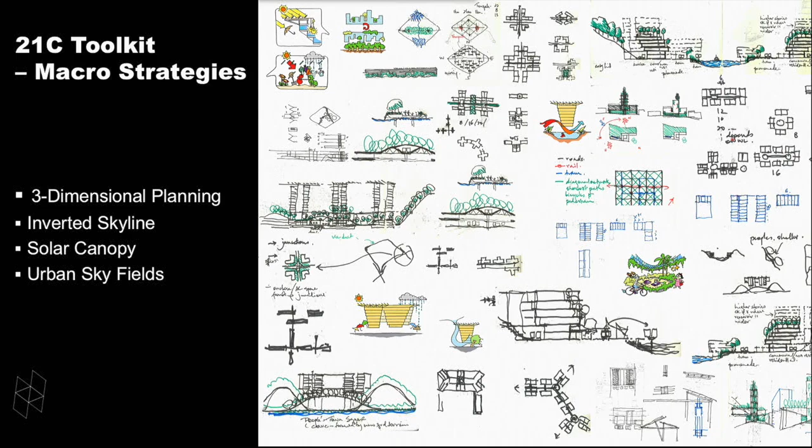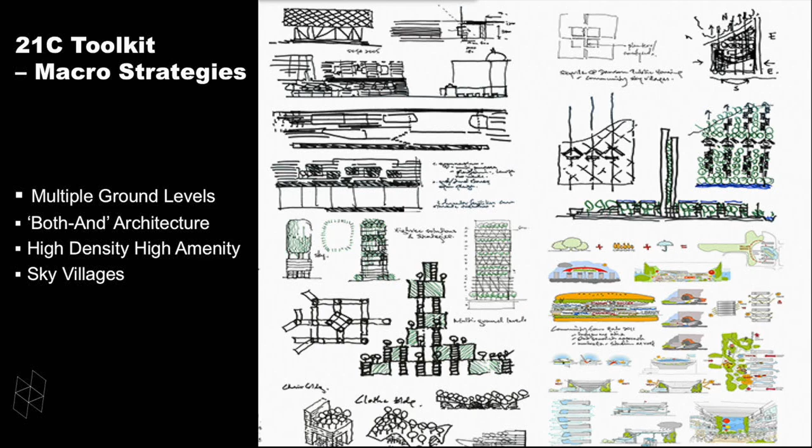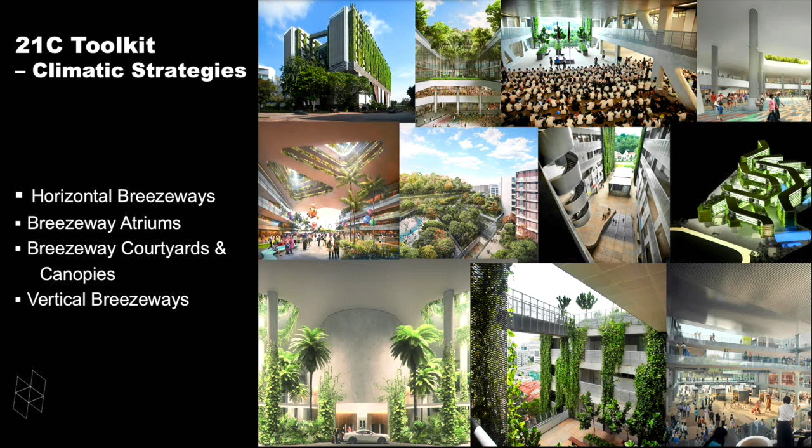Just because when we did our exhibition in Frankfurt, the German writer doing the catalogue was going, all this talk of wind, it sounds so unpleasant. And only when she came to Singapore did she realize how hot and humid it is and what still air we have. So this idea of wind, or breezes, which sounds a bit obsessive, is really the key to a low energy solution in any tropical development. The minute you create a pocket of dead air, it's actually unbearably hot and humid.

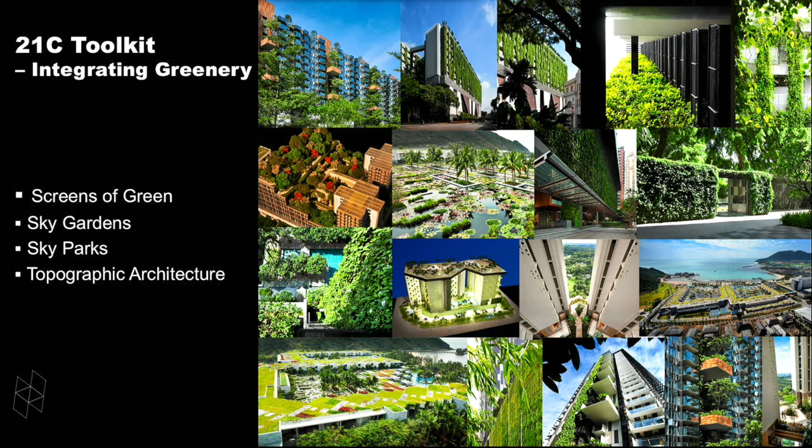And the final one, topographic architecture. There's a strange family of forms that you associate with architecture, but once you start putting plants all over them, the old divide between constructed elements and nature starts to blur. So we're thinking of ways that natural formations can actually inform the way buildings are conceived.

And then finally, as we were going through these and thinking about this 21st century city, we were thinking that there need to be metrics or measures that might be able to track this development, or ensure that some things we think are really important could be compared and measured between different developments. So we've started using these measures to analyze our buildings and track where they're going.

I think green plot ratio is something becoming quite a commonly used term, but essentially it's what proportion of your site area is available for gardens. The next one, community plot ratio, is this idea of high density, high amenity, making sure that the ratio of community space to other programmatic areas is kept the same or enhanced as you do a hyperdense development.

Ecosystem contribution index, so we're thinking of how, with all this potential for nature, to then take it one step further and say how productive is the nature, and how much does it support plants and animals and insects in the city.

Civic generosity index, so this is something we were trying to think, well, if you characterized your development or building as a person, what kind of person would it be? Is it a selfish, mean, psychopathic person who closes out everything else, or is it a welcoming, generous, open and friendly kind of development?

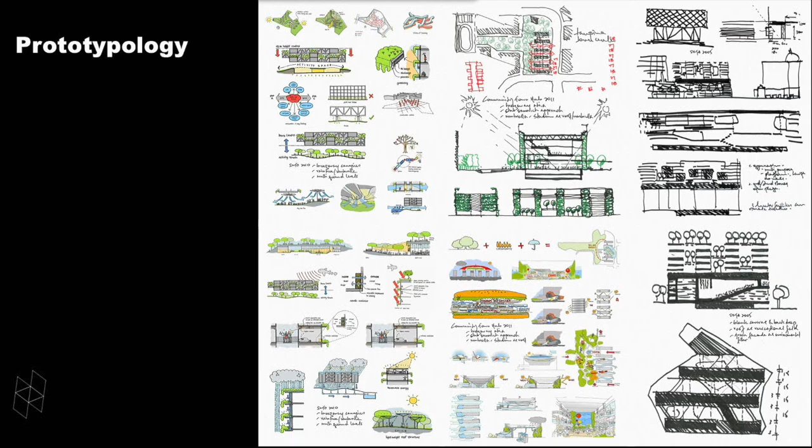So this was one project that we took part in the year 2001. It's something that was a competition, a public housing project of about 2,000 units. We didn't win this competition, but it was quite important to us because it sort of formalized a lot of our thinking about high density, high-rise solutions.

And one of the buildings that actually eventually got built is the Pinnacle in Singapore. But one of the fundamental differences between the building that was actually built and the building that we envisaged was really about the idea of creating communities in the sky, rather than purely just having homes that are just elevated above the ground.

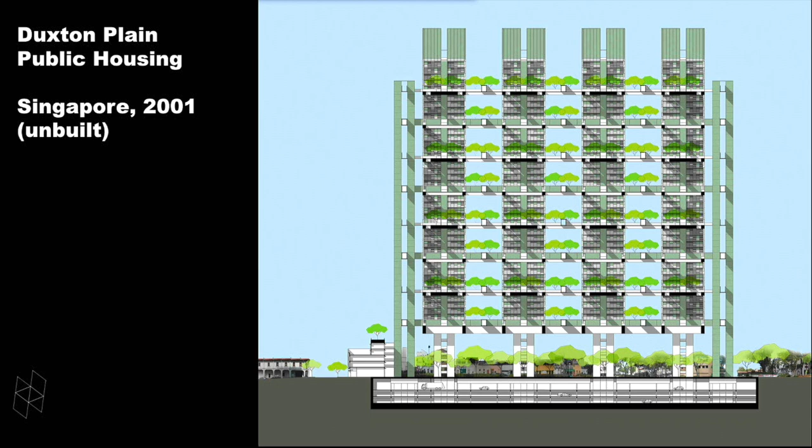But our thinking really was how we could actually create people who would start to bond and to actually know one another fairly well. And some of these strategies that we really adopted were things like creating one-room thick apartments, arranged in a way that they actually divided into horizontal datums, many multiple ground levels, where you actually do enter your homes, or where you go to your homes, you're actually walking through horizontal streets rather than taking an elevator up to your apartment, which normally what high-rises would do.

But the idea really is to create people to come up to a certain level and actually allow them to walk horizontally to actually connect to all the buildings, but at the same time, it's like a street. You actually start seeing people, knowing your neighbors, making friends, and the sense of community would actually happen from there.

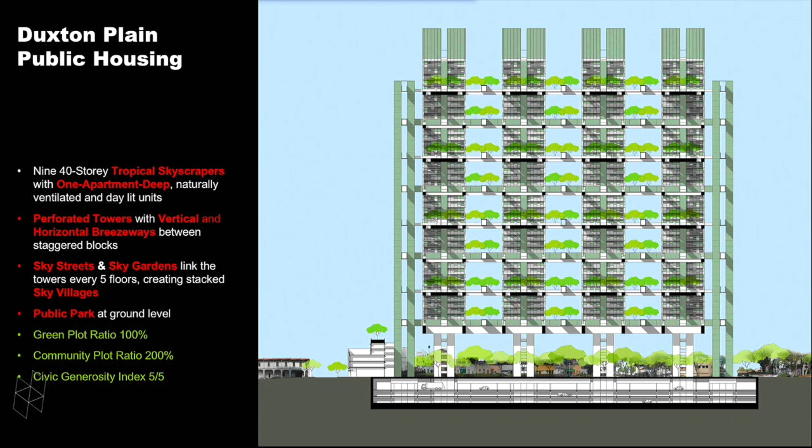This is a floor plan. It's basically 9 point blocks in a way, towers with a core in the middle. But the difference is they're linked up with a matrix every 5 floors. The 4 little squares you can see at each end, they're the high-speed lifts. So the idea is you would take a high-speed lift up to a street every 5 levels.

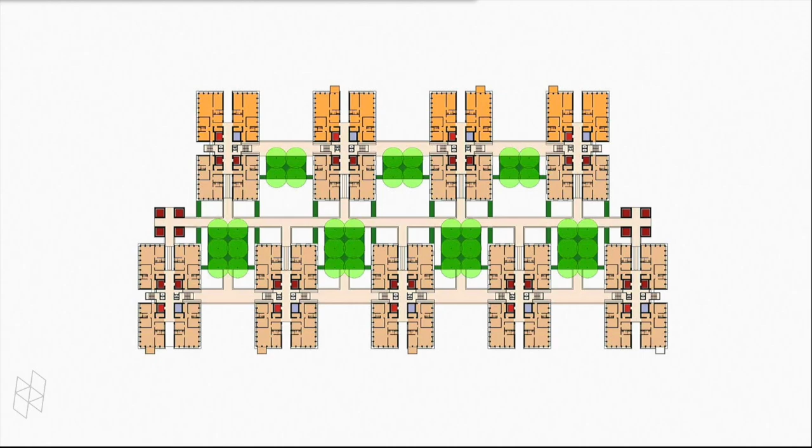You would then walk through the street back to your apartment through a series of parks. These are the sort of spaces that you get between the blocks. So although on plan it looks fairly congested, in fact the distance between the towers is about 18 metres.

Which is the same as the streets of Chinatown where this development is located. And by dividing it up and having these trees and human-scaled elements between the towers, the 18 metres actually feels quite a comfortable street scale, despite the fact that they're 50 stories tall.

This project did get built. This was 2 years after the competition, in 2011. We were given this opportunity to actually build this fairly high density, high-end development in Bangkok. And I think we managed to use a lot of the ideas, a lot of the strategies from the Duxton Plain competition and actually realize this mega structure.

I think one of the things that we eventually did create was, instead of having a very big and dense building, we pulled the buildings apart into 6 very tall and skinny towers, allowing almost all 4 sides of the apartment to have windows so that you can have very good cross ventilation through it.

So this is a typical plan where you can see it's actually 6 individual towers attached to 3 cores.

Connecting all the 6 towers are horizontal structures that also form private swimming pools as well as community public spaces on 2 levels in the building.

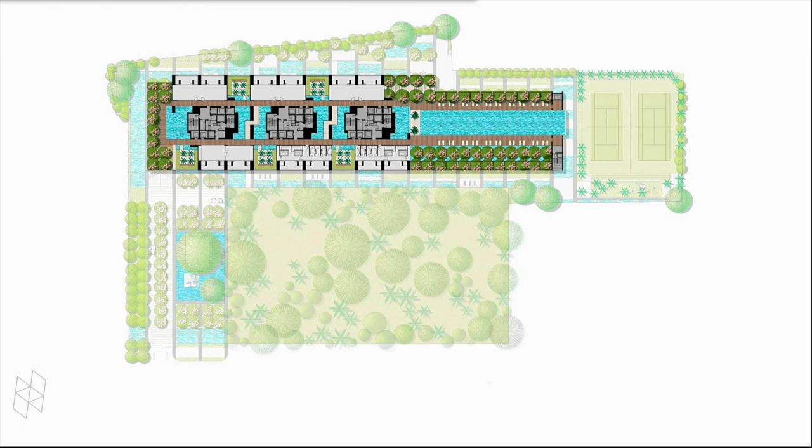So that will be on the 9th floor, where you almost have a new ground level with all the recreational and community spaces.

And you can see here at the 9th level, we have all the facilities like the gym, and we also put a lot of water on this level.

One of the reasons is that this water would actually draw the air up through the spaces to the top. We've done some tests, and we managed to have air movement of between 1 to 1.5 meters per second from the bottom to the top.

So if you open your windows in your apartment, the air would go through the apartment and then get drawn up to the top. These were the spaces in between the blocks where this hot stack effect happens.

This kind of open plan allows you to get rid of most of the vertical services through the building. So they become quite basic buildings in a way, where you just have the lift, you have the water pumped up and down, but there's none of the vertical extraction of toilet exhaust or kitchen exhaust. You can have individual unit cooling as well.

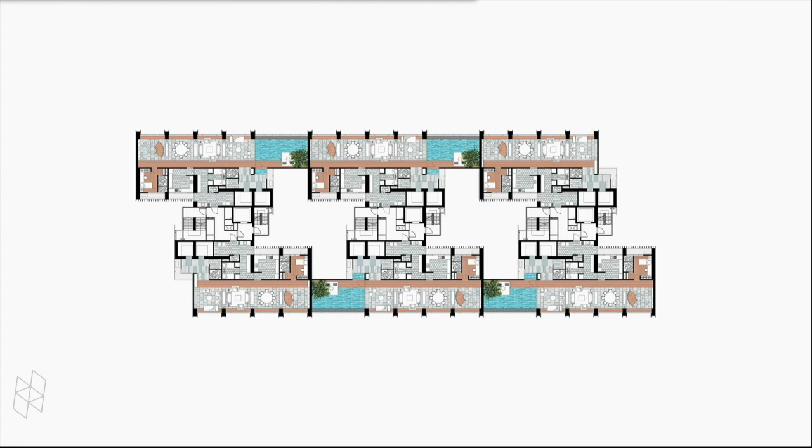In fact, City of Sydney recently did a study and found that even in Sydney's mild climate, 60% of the energy use of the building was just in the common areas, the car park, lift lobbies, and ventilation, which seems extraordinary considering that's only 20% typically of the building area.

So this would be one of the units on every 6th floor, a duplex unit, which has the living and dining spaces flowing into private swimming pools and gardens.

Then you can actually see all the swimming pools stacked 6 stories up, all the way up to 69 floors.

This was a lot smaller project, but it was also done at almost the same time as Newton Suites. What we were really keen on with this one was how we could create small sky gardens in the development, so that you could compensate for the lack of size in the apartments. At the time we developed this, these became the smallest apartments in Singapore.

In Singapore, where most people live in high-rise apartments and public housing, they don't actually understand the sense of living on ground. We wanted them to be able to enjoy a small piece of garden and to feel like they're actually quite close to landscape.

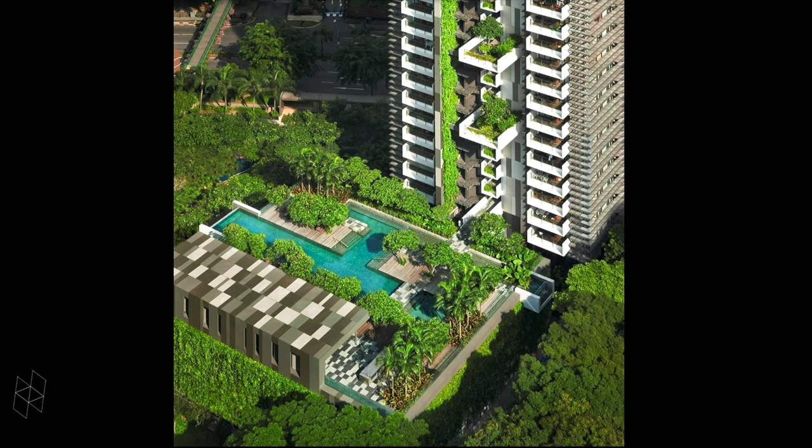This was one where they just changed the regulation in Singapore to make common gardens in the building not considered as floor area. That made a big difference to the economics of it, because land costs in Singapore are very expensive. So if you lose area for gardens, that means the developer can't sell that area for apartments. By making it free of floor area, the developer pays to build these little gardens but doesn't lose any saleable apartment area.

That was basically the key to unlocking all the future projects where we use these gardens in Singapore.

So the plan is actually quite simple. There are only 4 units per floor, and 2 lifts for the entire development, arranged around a small sky garden and a fire escape that's used to maintain the vertical greenery in the development.

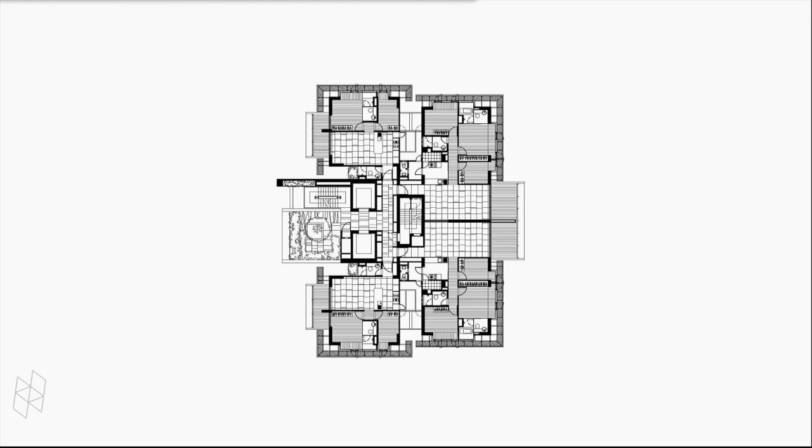So in cross section, you have these little sky gardens every 5 floors, and when you come back home to your apartment, it's like coming back home to a house, where you actually see a garden first before you open your door into your apartment.

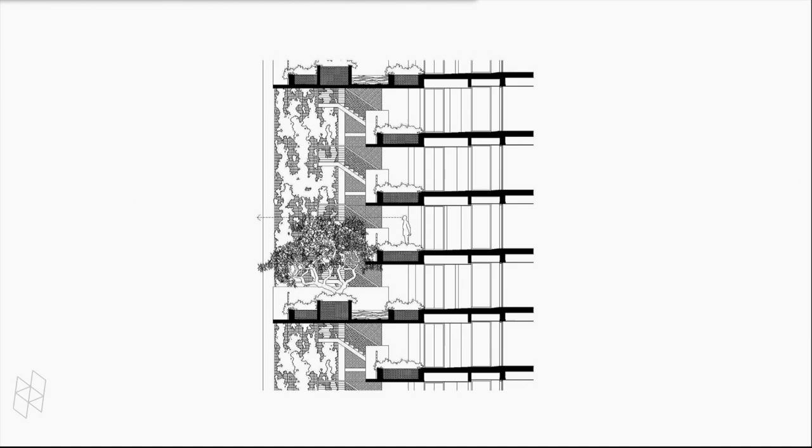Another trade-off we did was in the lift speed, because lifts come in quantum jumps of speed. The lift engineer said no, for a building of this height, you need faster lifts, because of the waiting time involved. We said, but you can have maybe 5-10 seconds more waiting time when you've got a garden outside the lift and a view, versus an internal lobby. The lift engineer didn't agree, but the client agreed. And no one has ever said the lifts are slow, because time feels very different when you're looking at a little garden.

The apartments are actually quite small. The two-bedroom apartments were something like 60 square meters. We do have young families living here, and instead of feeding the kids in the apartment, they actually bring them out into these common sky gardens and have them fed there. It's also very popular with expats and young working adults who smoke - they come to these little gardens and gather together, and it's highly popular for young adults as well.

I think what was really interesting for us was that we got a complaint from one of the homeowners on the 24th floor. When we found out the complaint was that the kids got stung by bees, we were actually quite happy to note that we managed to have insects, living creatures, all the way up that 24th story.

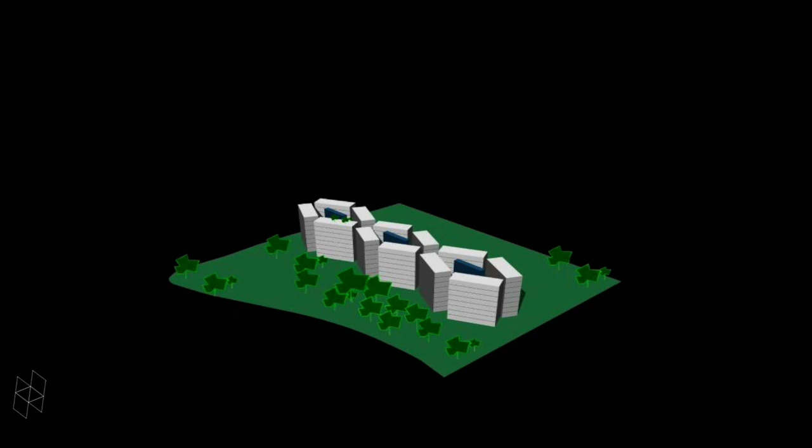You want to explain these diagrams, Richard? Yeah, so the idea was we felt 960 houses was really too many families to get to know each other, so we were interested to create a sort of smaller unit. So the idea was that every apartment belongs to a village, and a village has 80 homes in it.

So we have 12 villages of 80 homes, and these share this physical volume of a sky village level, and then as you come out of your lift, you will cross this volume, you can look down into it, and it has a completely different sense of scale to what you would normally expect in a 47-story building.

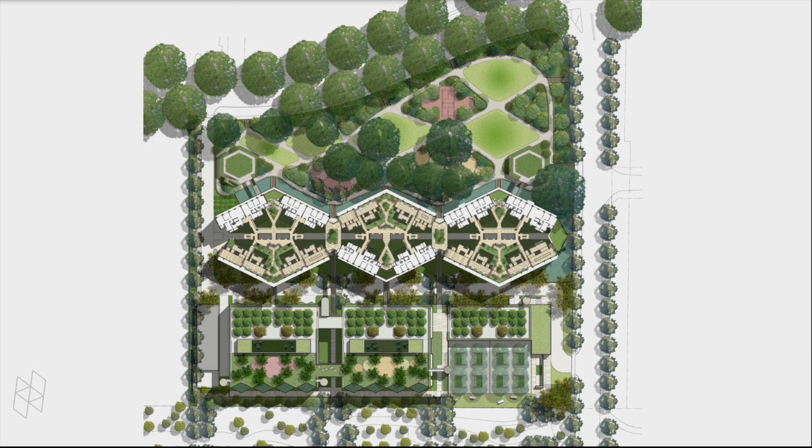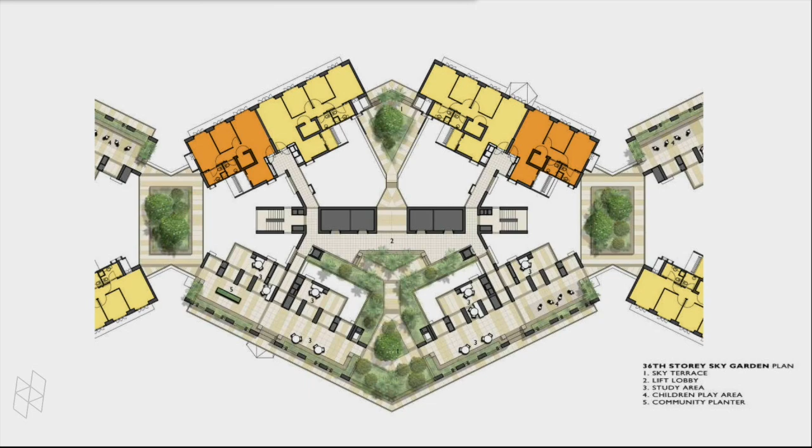So the plan here shows this diamond-shaped plan, so that's the big move, is really to open it up into this diamond and create the space inside. And then if we zoom into one diamond, you'll see that we dropped apartments on one side of it as a double volume space, and this has gardens and spaces for just meeting and having a barbecue.

So vertically, each tower is divided up into these 4 villages. And these are the kind of spaces. As public housing, they don't have a very active management, so they're quite simple.

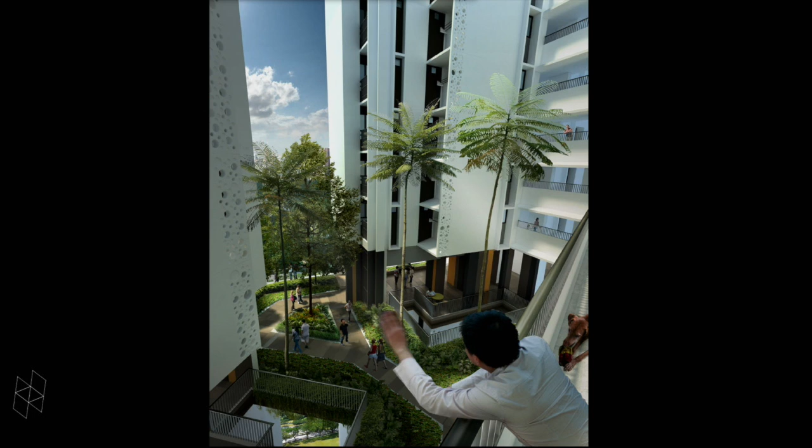And this was also the rendering that we did originally at the start of it. And one of the things that was quite important for us was really to maintain visual contact between these 80 homes and that common space.

It's actually up to 8 to 9 stories, and 11. That what, 10? 11 total. 11 total. And I think that was actually the furthest that we will go, so that when you're up at the 11th story, when you look down, you still can actually recognize the person on the common space.

The idea is your kids would play here. You would bring the dog here to walk it. You could just have, so there's a very different thing that you can step out of your apartment door and call your kids home for dinner, for instance, which is something in a typical high-rise you just can't do.

And it's an interesting way it sort of frames the city and pulls the views into this space in the middle.

So this is a different kind of development. This is actually a School of the Arts, actually located in the heart of the civic entertainment district of Singapore. And this was actually a very compact specialized art school for young kids from 12 to 18 years old.

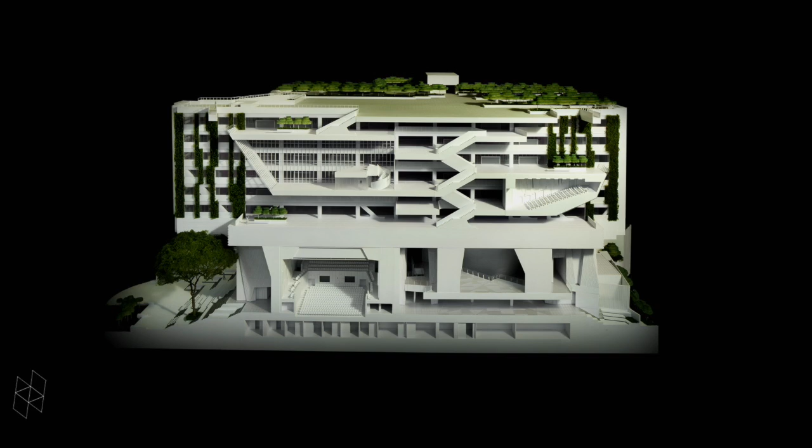This was on the lower level where we actually have the 3 performing arts facilities. And it's actually a public thoroughfare. Anyone can actually walk through it.

But what we did was we actually chose not to air condition the pre-function spaces of the theaters, and these were actually used for other uses like large functions that the school would actually organize. And then behind them, they're actually the performing arts facilities.

But on the 5th level, you can see it's almost the entire site area, and this is actually used as the assembly hall, assembly floor for the school.

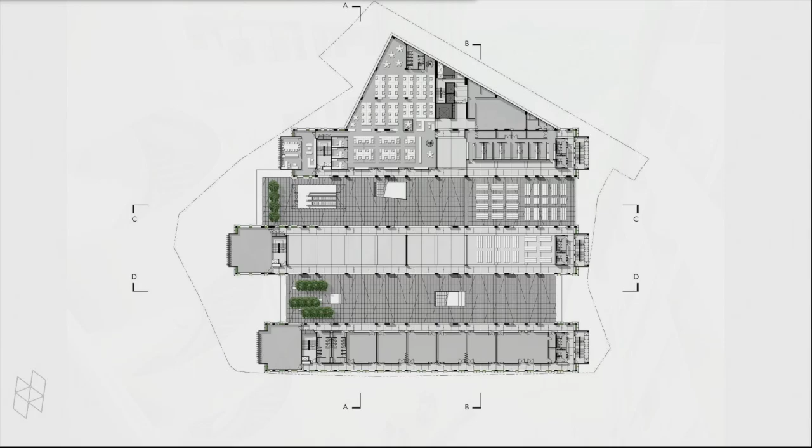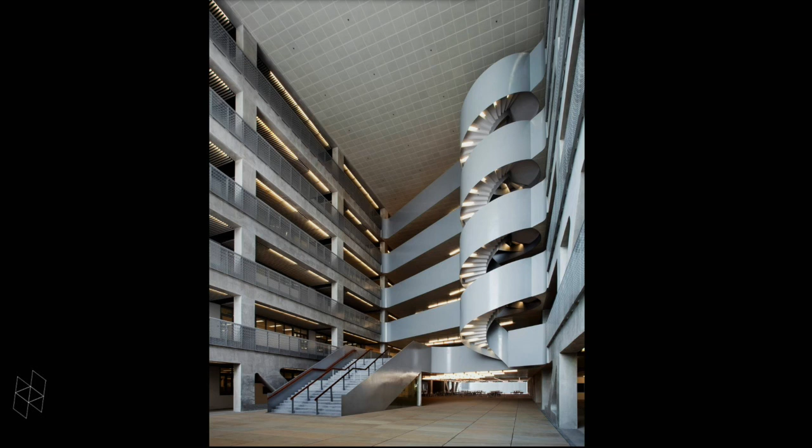You can actually see there's light at the other end, so it's a through space. This is where the wind gets funneled through these spaces, and because the wind does move through them, the classrooms themselves are quite effectively cross-ventilated as well.

We have a variety of gardens that float amongst these spaces, so between lessons and lunch break, the kids have outdoor areas to play. And the roof itself has a 400-meter running track around it.

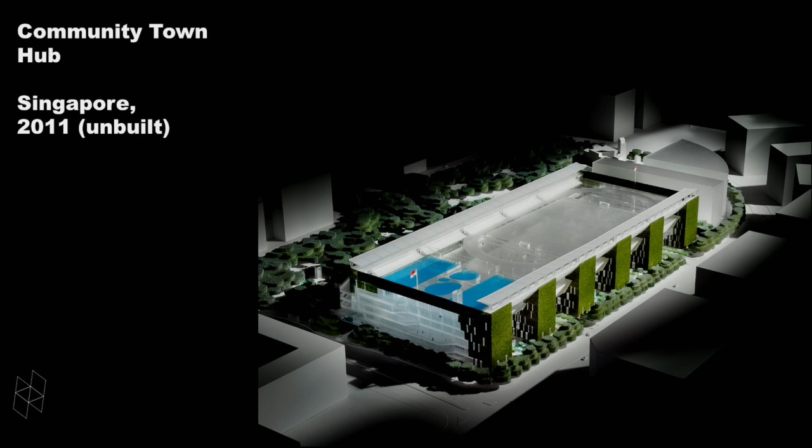This one was a competition entry that we did, but something that would not be built. I think this was something that we wanted to demonstrate, that we could actually think outside the box and use the stadium as the roof of this large facility.

This was really an institutional community project, consisting of many government institutions as well as commercial facilities. But they actually asked for a stadium. One of the things we thought was that if we put the stadium on the ground level, which is normally what people would do, you'd end up covering a much larger footprint. What we wanted to do was try and create a natural park that joined up with the linear park adjacent to this development site.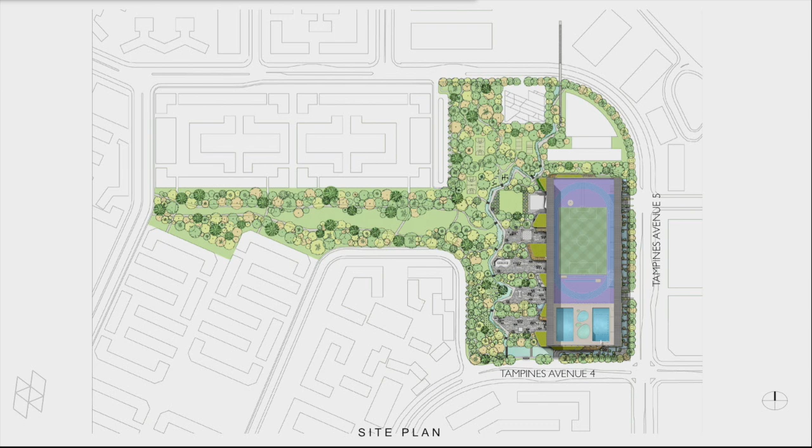By putting the stadium on top of the roof, we only occupied 50% of the site area. But at the same time, we provided a roof over all the public spaces that we get in the building.

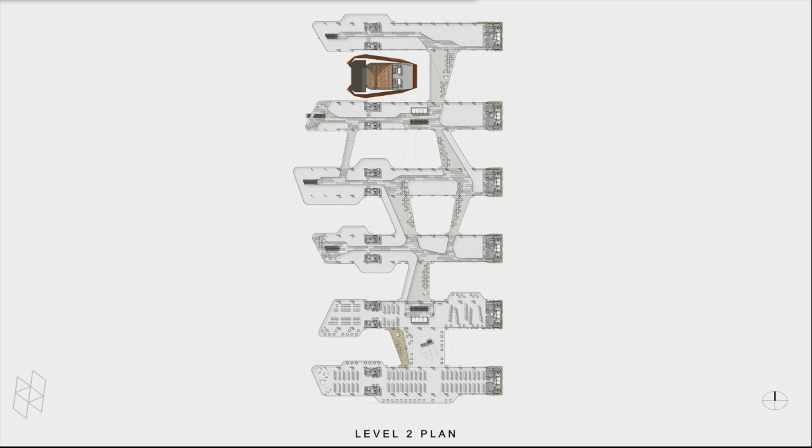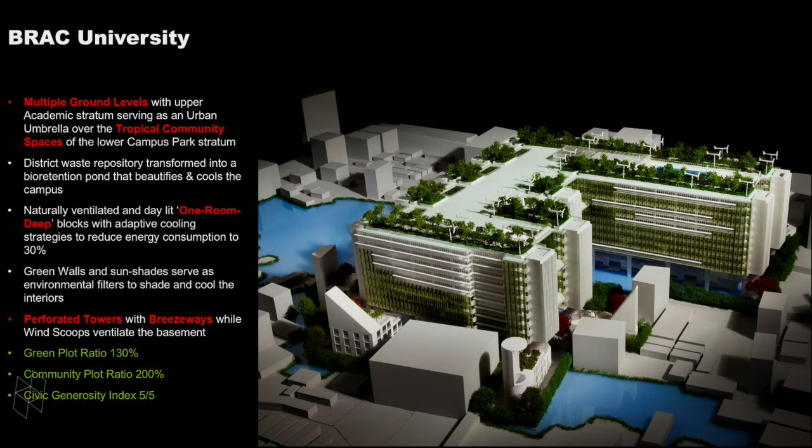There's another one of the same family. This one is being built in Dhaka in Bangladesh. Dhaka is a pretty hardcore city, extremely poor. The population is exploding - I think it's got the fastest growth rate of any megacity in the world at the moment. And it has really severe problems.

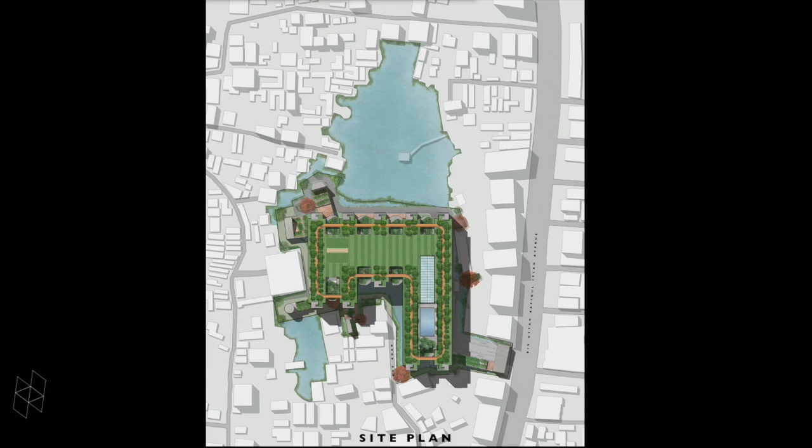This university, BRAC, is owned by an NGO organization which does really great development work, and the courses are all based around development. So we thought it would be really nice if the building itself becomes a kind of teaching tool and a vision for development for Bangladesh.

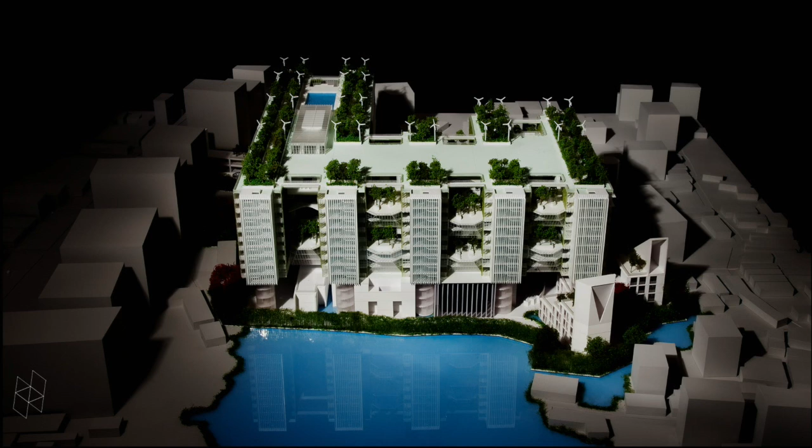It's sited in what's at the moment a rubbish-filled swamp, and the idea is the building itself is going to regenerate all the water into a healthy waterway. It's raised up above it, and this whole area is a publicly accessible community space beneath the university.

The kind of typology we chose for this too was using horizontal breezeways. And the difference between this and the School of the Arts is that this is almost 10 times the size of the School of the Arts in Singapore.

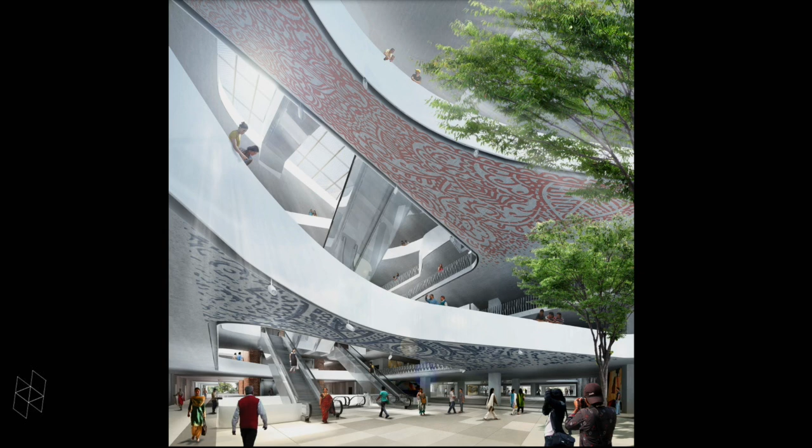We're using these covered community spaces, but essentially trying to limit which facilities are air-conditioned to the absolute minimum, and using a lot of just passive devices, but in a very large institutional building, so that it's a very low consumer of energy.

This is a project that has been built in Singapore, the PARKROYAL Hotel. For us, it's something we've been quite excited about because it does incorporate a lot of these ideas we've been talking about in one building.

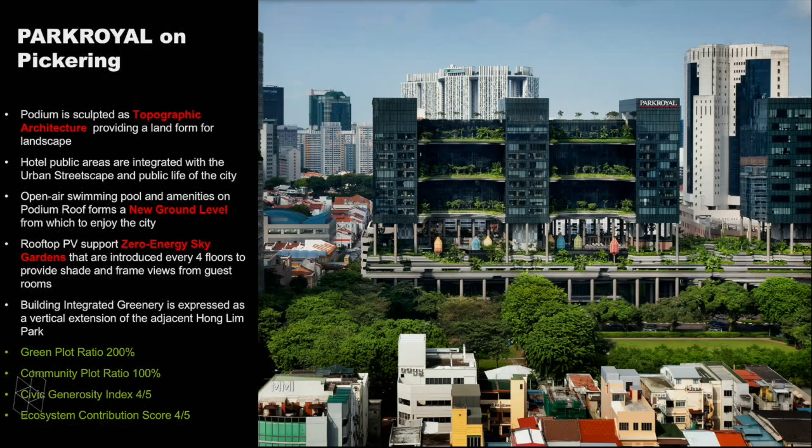I think this drone video shows that this building is actually quite different from the buildings in the surrounding area. It's visibly green, and one of the things we managed to achieve is a green replacement of 200% of the site area. At the same time we were able to duplicate the urban park in front of it entirely as horizontal surfaces, gardens in the building.

This has a 200% green plot ratio, which we think is really interesting - there are twice as many gardens within the building as there would be if you didn't build a building at all. For us, that was a pretty exciting statistic. And this idea of a building as a real landscape, a romantic, interesting, exciting landscape within the city, is something we find very appealing.

Interestingly, for people in the street, it's super appealing too. Almost every person - our office is very nearby, so we're always walking past it - it's really nice seeing people tapping each other on the shoulder and taking photos and selfies in front of it. Just tourists walking down the street, not architecture people who are interested in architecture at all.

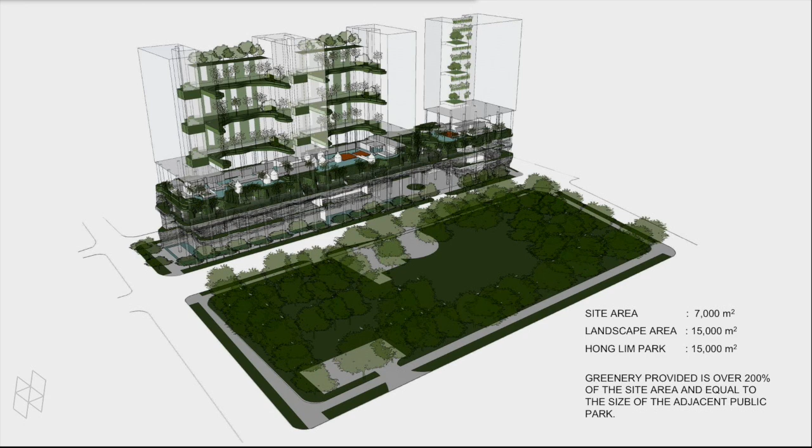I think this diagram actually shows you how we actually created the same area as a park with gardens in the building. What we did was the podium, which comprises the car parking and the public areas of the hotel, actually supports the largest area of gardens in it. Then on the upper levels where the guest rooms are, we created 3 levels of sky gardens to divide that building that floats above the podium into almost 3-4 stories, a similar scale to the shop houses in Chinatown adjacent to the building.

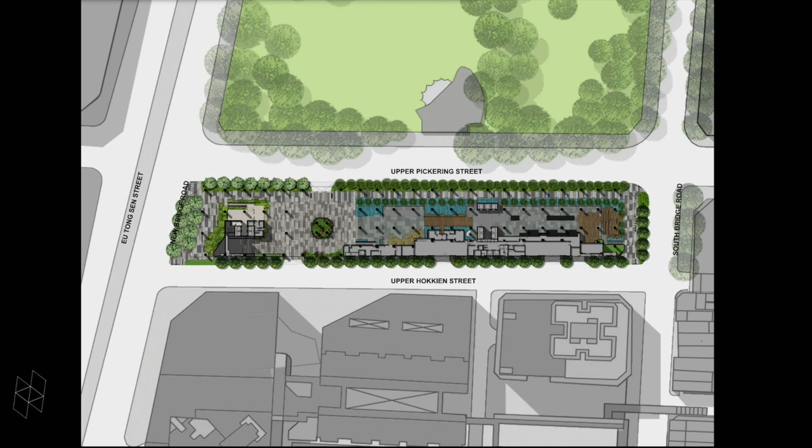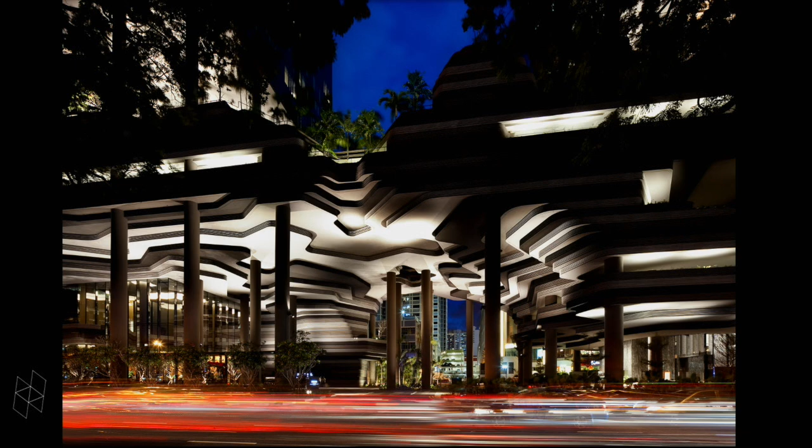You can see on the ground floor plan, it's almost an extension of the park across the street. Again, our language of topographical architecture really supports a lot of landscaping, and also at the same time creates tropical common spaces. In this case, this drop-off is actually used as an event festival plaza.

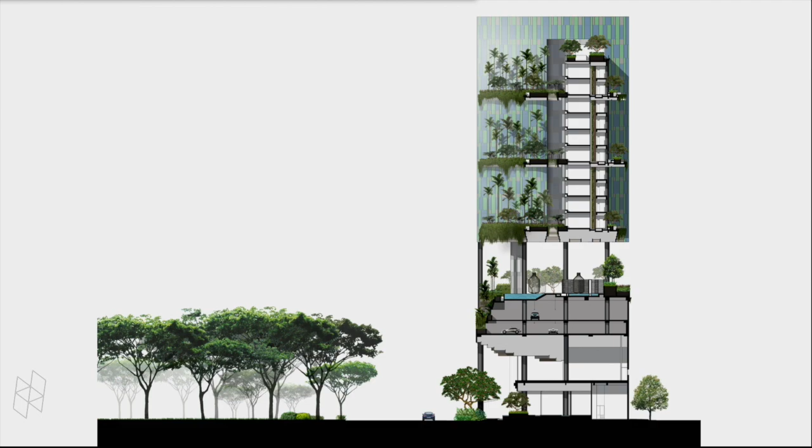This is a cross-section that shows you that we don't have a basement, but we have a podium that houses the car parks, and then the guest room blocks above. On the 5th level, it's almost the entire floor plate that's used as the recreational facilities for the guests.

And then the multiple levels of the sky gardens that almost merge with the urban park in front of it. But when you're on the 5th level, you really don't realize that you're above ground. It almost feels like you're actually on real ground level.

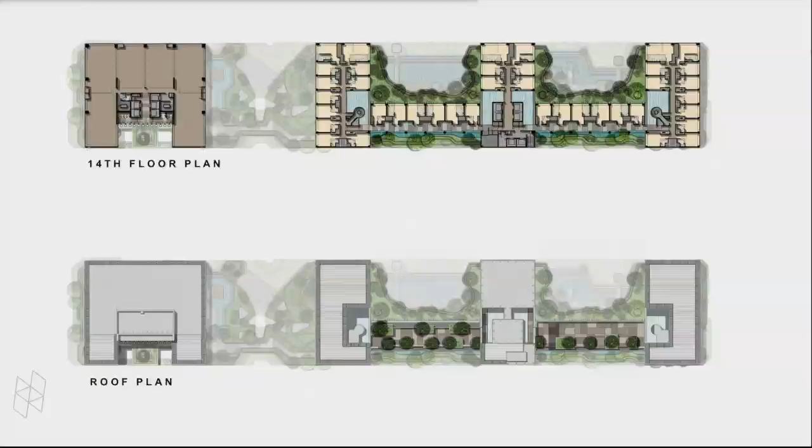It was these kinds of areas that gave us this idea that really, it can be, for future projects, more than a garden, but can be a true ecosystem if we work with the right kind of plants and things to support a lot of life.

What we managed to do in this hotel development too was reduce the air-conditioned areas by 50%. So 50% of the guest room corridors are actually naturally ventilated, and also 50% of the hotel public areas were also naturally ventilated.

So it gives guests a new experience of actually walking through garden walkways into their rooms, and also at the same time creating this vertical garden landscape that's facing the public park across it. From inside, looking out, it's really just gardens.

So in that project, we managed to create a green replacement of 200%. We wanted to try to see whether we can even achieve a higher percentage. And we managed to do it with this vertical high-rise building, that's also a hotel and offices. We managed to push the percentage up to 750%, so it's 7.5 times the site area as green replacement.

And that, I think, is quite tremendously exciting, because you could imagine a city of these kinds of buildings could have 7 times as much nature as if there was no city at all.

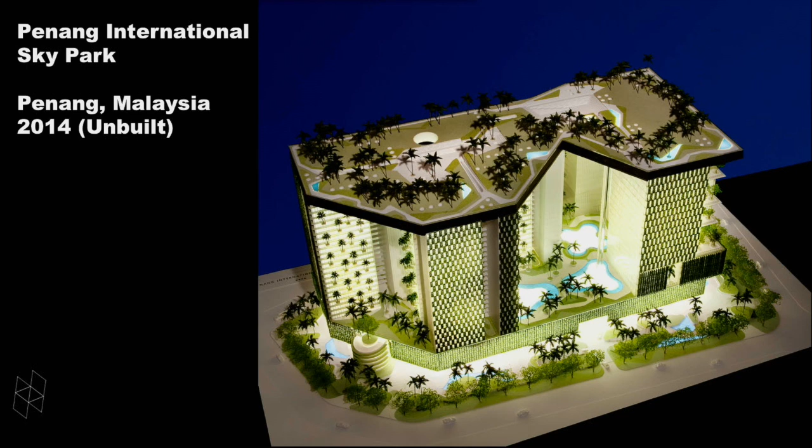So this is one development we wanted to show, which really created a roof that turns into a park for the people. I think this was actually not built in Penang, and the idea was to give back to the people of Penang a public facility for a rather dense development.

So to create the large floor plate, the public park or sky park, we actually had to use the buildings as structures to support that park.

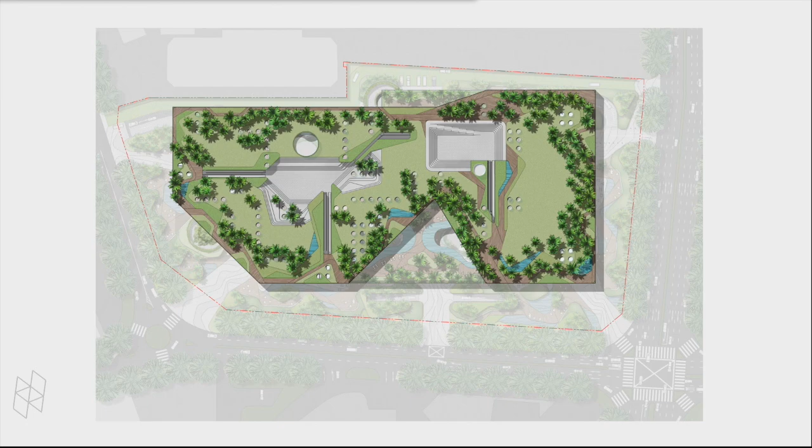So that project, unfortunately, will not be built, but this one we managed to get through. This was a smaller project, an elderly home, but it's the first of its kind in Singapore where they are mixing elderly home with a medical facility, a retail component, as well as a bit of community use.

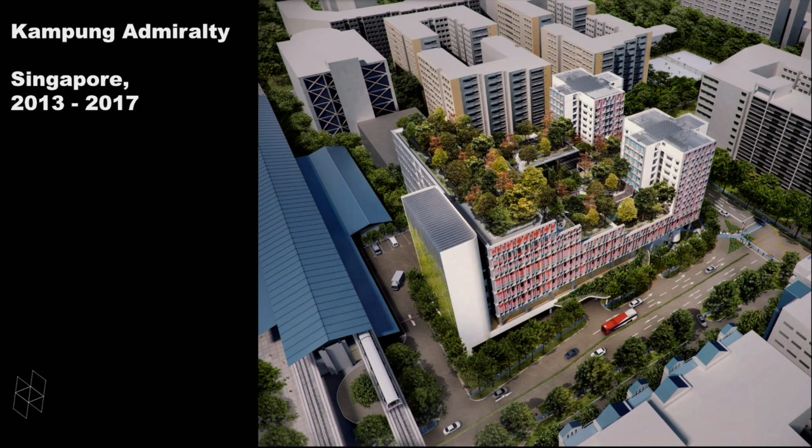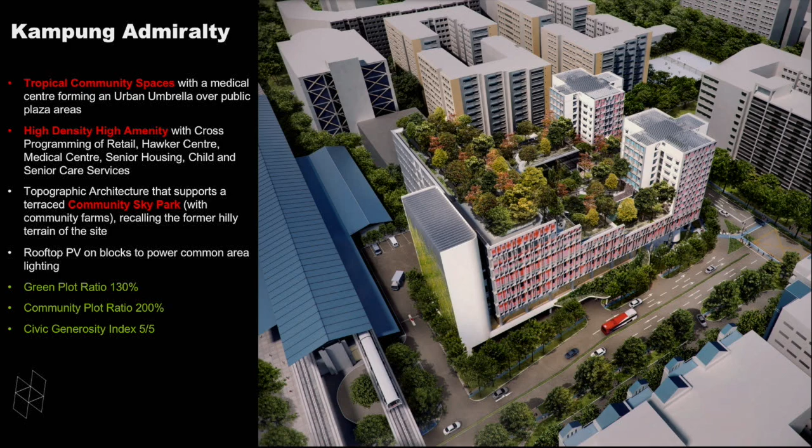And what we created again was a private, semi-public community park above where the elderly housing will be located, then basically using the specialist center, the medical center, to support this new ground level and sky park.

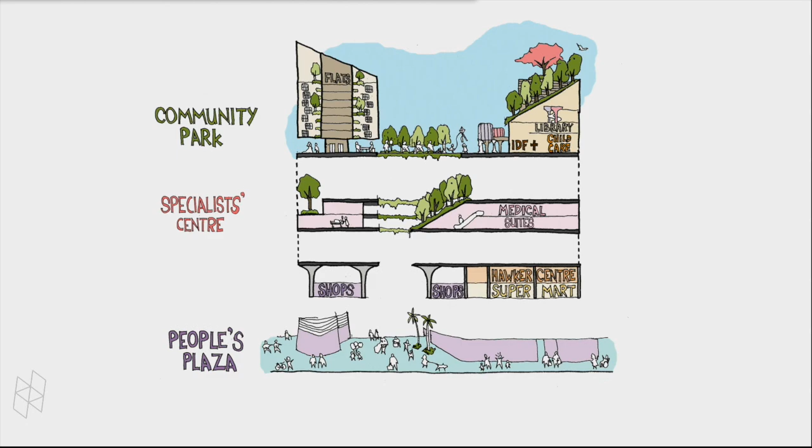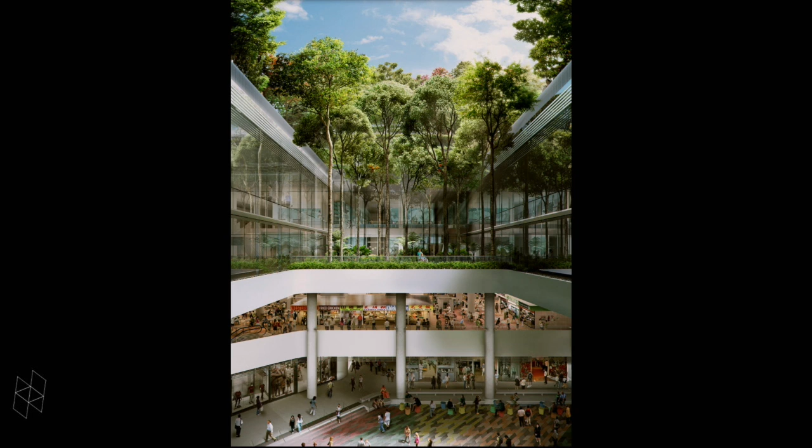And yet at the same time using this large floor plate to provide a covered space that becomes a People's Plaza. So this is the lower level where you see the People's Plaza and the floor plan of the ground level. But when you see it stacked above, you have the public plaza at the bottom, the retail component, and then the medical facility, which forms the largest floor plate that supports the community park above, where we have the elderly housing.

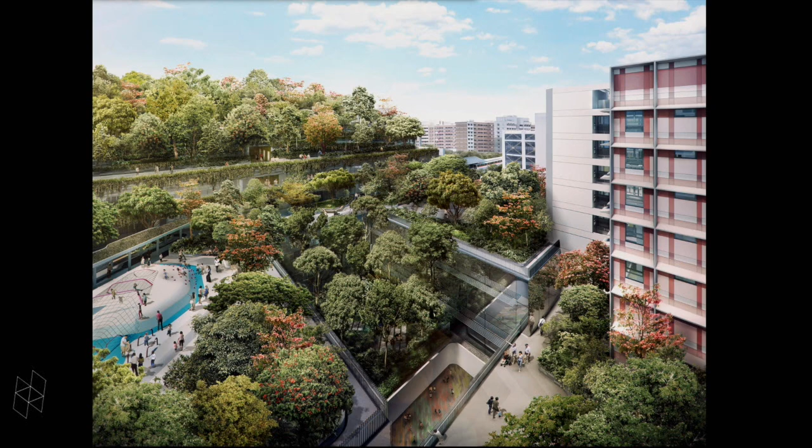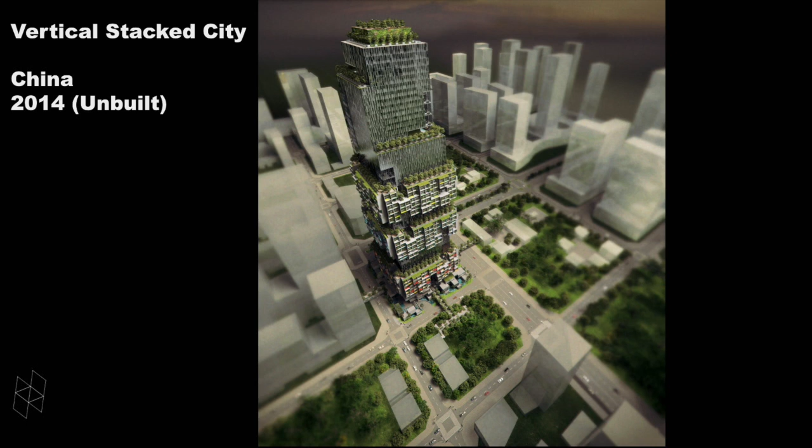This is something we're starting to look at: how to rethink the office building. Instead of purely an office building for corporate clients, we think there's a possibility of mixing a more mixed use of SMEs, small and medium-sized enterprises, working alongside corporate firms. We tend to think small and medium offices are different in nature—people live and work in their offices and homes, so it's kind of indistinguishable. What we wanted to do was juggle this together with corporate offices.

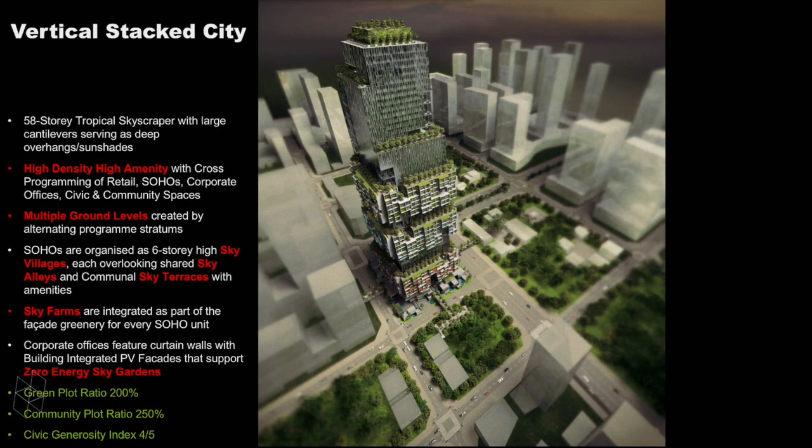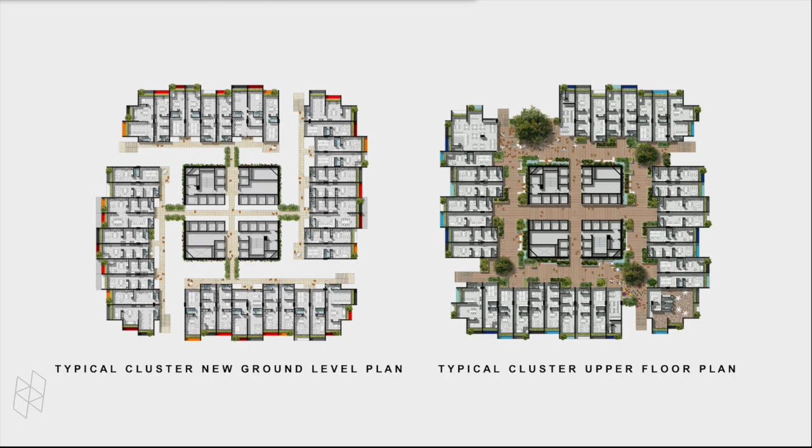We realized that in a lot of old cities you tend to get this mix anyway, with smaller scale buildings within the CBD alongside the MNC towers. But in new megacities, like in China, where they master plan a whole area, it becomes a monoculture of large corporate towers. So the idea is you could have architects' offices, advertising agencies, graphic designers, mixed up with large corporate floor plates. Within one cluster we felt there was a minimum of having a cafe and daycare facilities for the young and old—this was the minimum for a creative cluster of small offices and homes.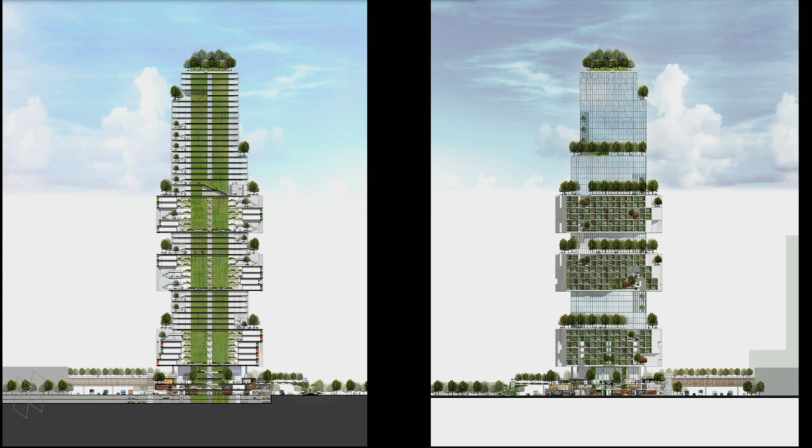Expressed as little clusters, they interlock with the corporate offices. Unfortunately, the things we liked about it were the things the client didn't like about it—they said it looks like it's covered with shanties. So we're going ahead with it, but in a different form.

I'm going to talk about this one now. We showed it at the beginning—it was a scheme we did with a few universities for the Vertical Cities Asia conference. We wanted to push density up to 100,000 people per square kilometre. We led the studio, and we thought we better do the exercise ourselves since we weren't sure what it would look like. It's basically four times as dense as Manhattan.

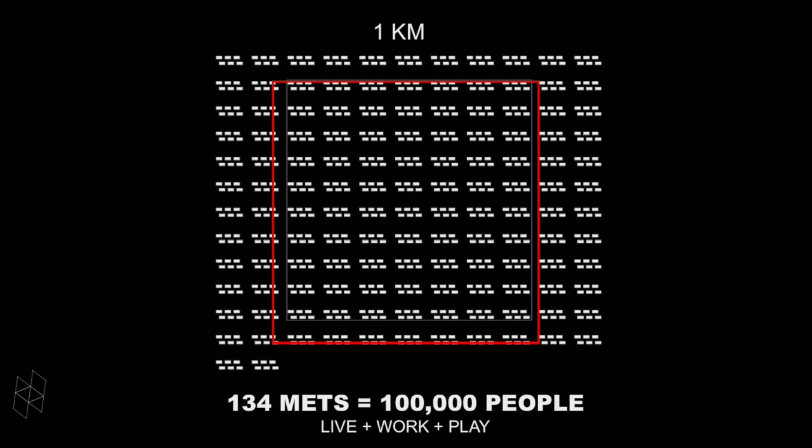If you look at the Burj Khalifa and its population, you would need to put this many Burj Khalifas into a square kilometre. So we thought, in the same way we used smaller components to build our high-rise buildings, we could use our high-rise buildings to build a more intimately scaled mega structure. We would need 134 of our METs in one square kilometre, but if we stack them up in multiple layers, we could fit them in.

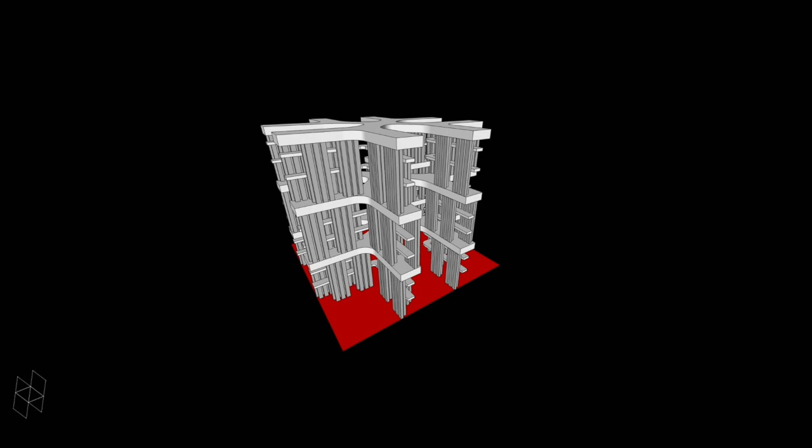Using these as components, we could create this, using them as columns to support city conduits. We'd still have cross-ventilation and openness to light and air, even extended to this huge agglomeration. So it's taking all the population of Singapore, 5 million people, and building another city with the same population but only one-ninth of the floor area.

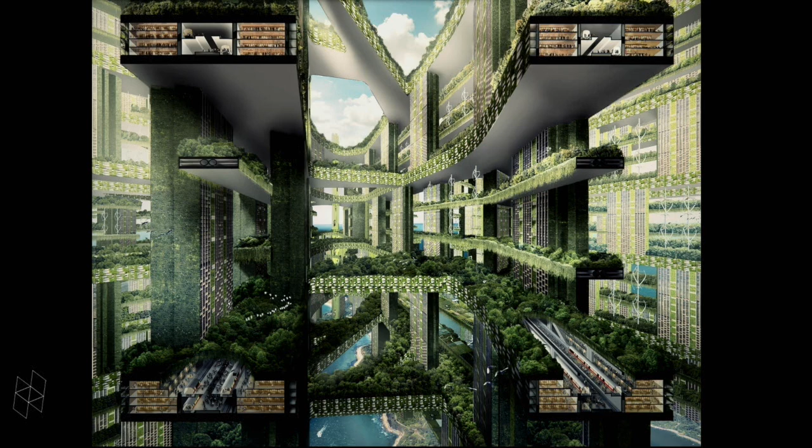It's a theoretical project with a host of issues, but it raised some really interesting things. For instance, once you have multiple ground levels, you don't have the usual choke point of a super high-rise tower where everyone tries to get out through the lift and down to the street. In this case, people are going up just as much as they're going down, and they can walk through the city without ever coming down.

So your lift system becomes much more efficient, and structurally as well—super high-rise towers are cantilevers, so they end up very over-structured to support themselves. In our linked lattice city, they all support each other. This final project we're going to show was an actual scheme for a new town in Singapore, which unfortunately we didn't win, but it takes all the concepts and prototypes we've talked about and puts them together.

This is a city for 200,000 people that's actually self-sufficient in electrical energy, vegetable production, and water. So this is the idea of the inverted skyline.

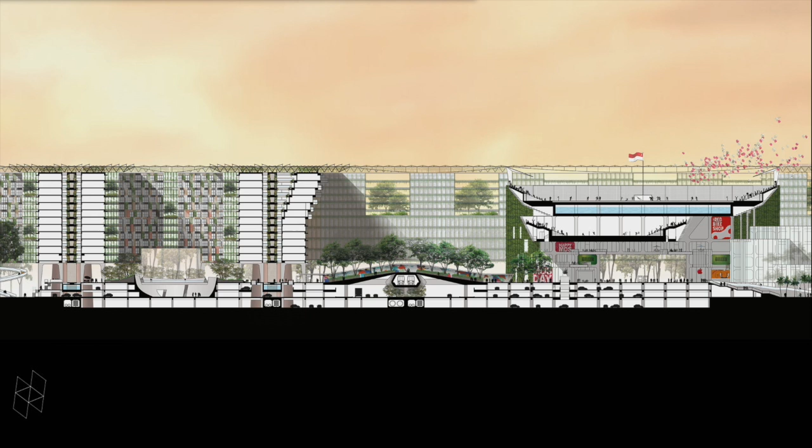So the 20th century city with its bar chart skyline of land values, we think is actually quite disastrous anytime you're thinking about solar panels, because solar panels, even with a shadow across part of them, drop in efficiency by half. So the idea is that we have a flat skyline on top, which is maximum efficiency for harvesting energy and growing food, and we have the skyline underneath.

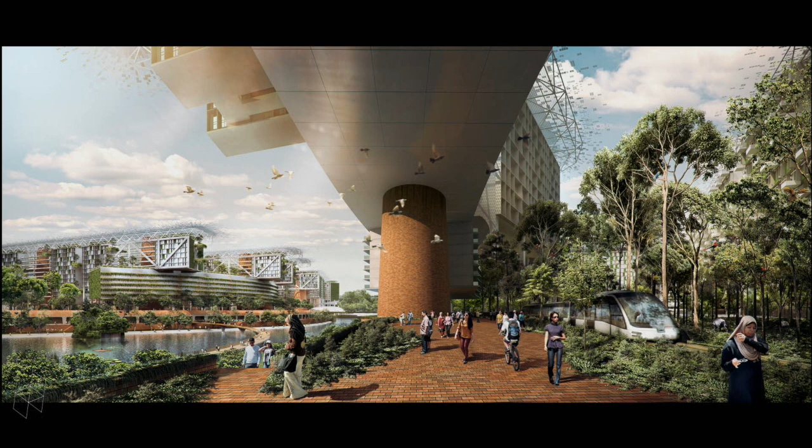So where the pedestrians are is where you have really interesting volumetric play of spaces at the ground level. We have a full ecosystem, a dense rainforest running right through the city, sharing the ground plane with pedestrian circulation and public transport.

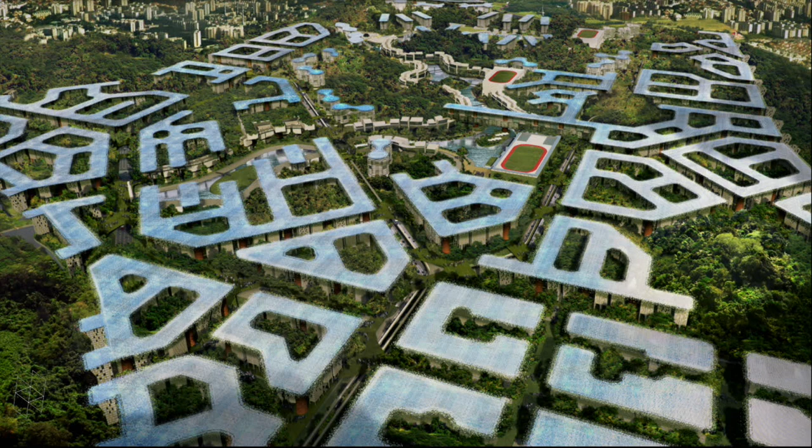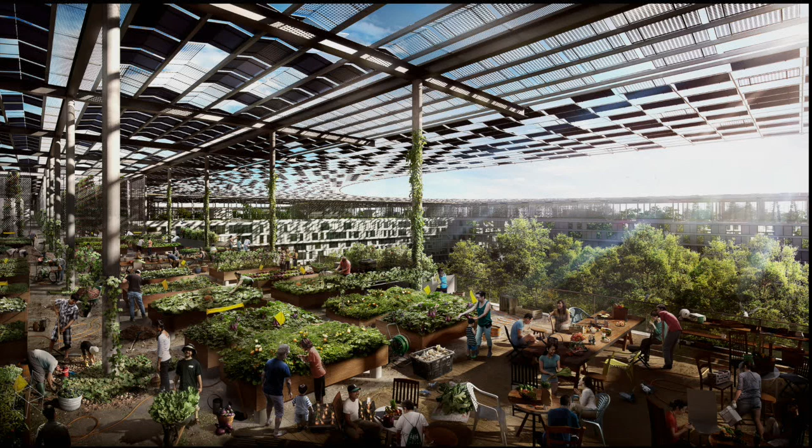And this is where you see the solar canopy at the rooftop. So this is something that extends out beyond the building footprints and between the buildings. And at this level of PV, about 20 stories, we could harvest enough energy for the city to be self-sufficient. Below this canopy, we have a full farming level, where you can grow enough vegetables for the population within the city as well.